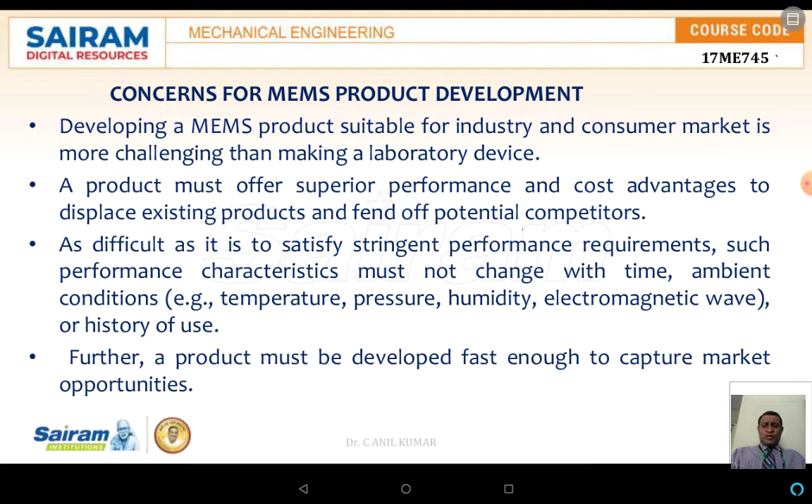What is the need for MEMS product development? Developing MEMS products is suitable for industries and consumers, but the major challenging areas are cost and size. There are many parameters affecting MEMS technology, making it difficult to satisfy the stringent performance required. Performance characteristics must not change with time or ambient conditions like humidity or electromagnetic waves. The product must be developed fast enough to capture market opportunities, and the development effort along with investor funding is also a major concern.

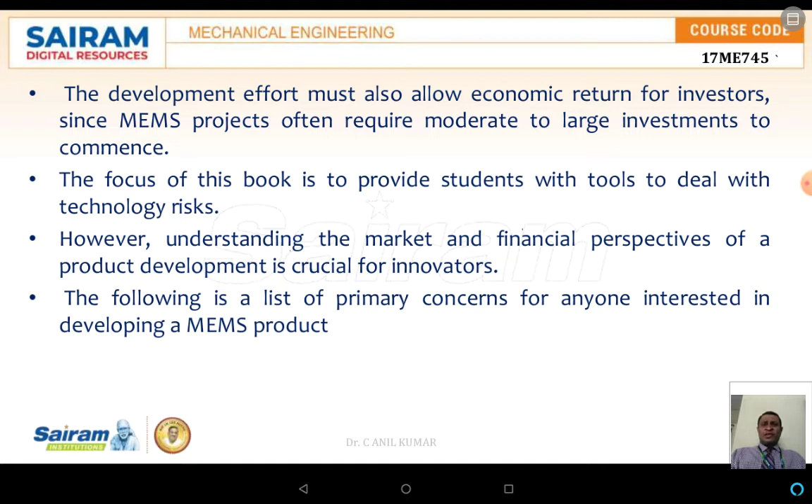This is the focus of our analysis: the concerns of MEMS product development. The first is performance and accuracy. MEMS devices rarely enter the market as a completely new product category. These devices must compete with existing products and also be low cost, as in the case of blood pressure sensors, accelerometers, gyros, inkjet printers, digital light processors, and resonators.

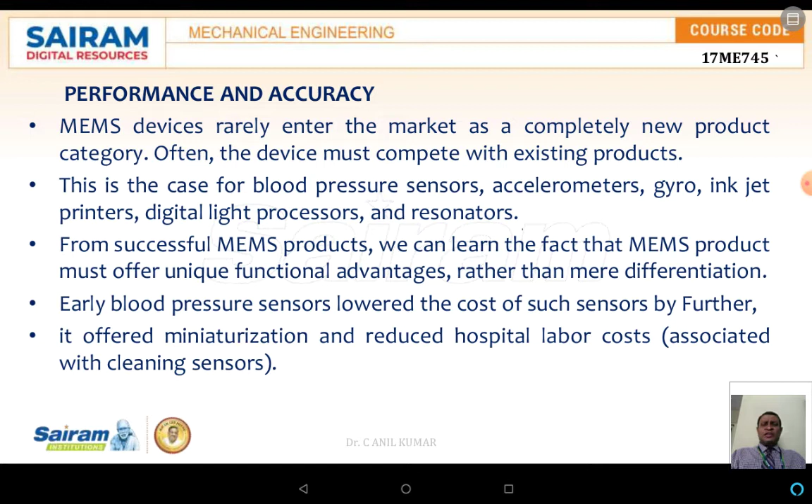From successful MEMS products, we learn that a MEMS product must offer unique functional advantages over other products. Furthermore, it offers miniaturization and reduced labor cost. As the technology is smaller, human intervention is less, but the fabrication cost involved is also very high. Since fabrication cost is high, it must go toward mass production, which will automatically reduce the cost.

Sensor devices must simply meet the requirements: detection limit, sensitivity, linearity, and immunity to noise, as well as environmental changes and immunity to crosstalk. The design of MEMS must allow such issues to be addressed.

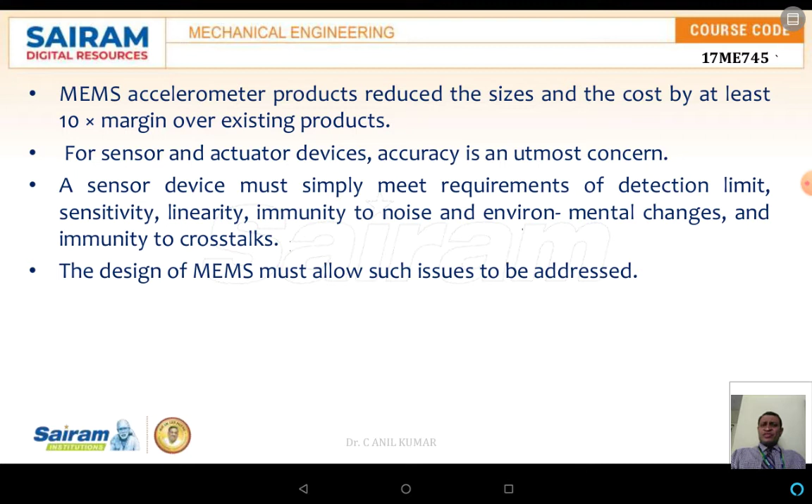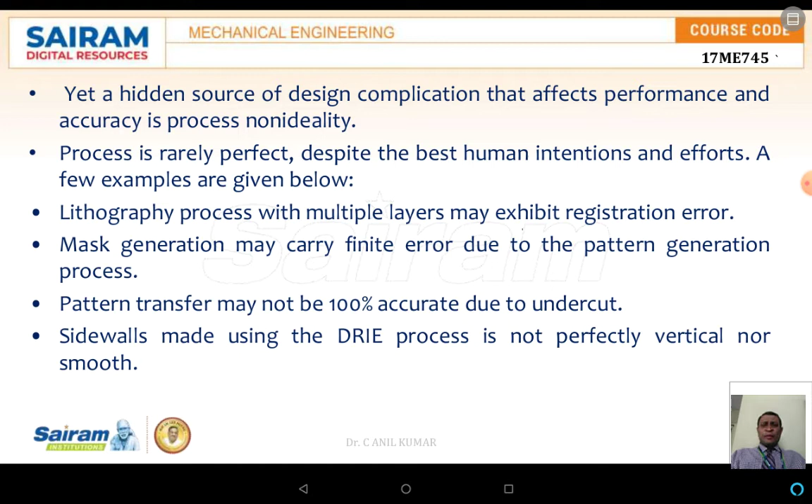There are hidden sources of design complications that affect performance and accuracy, process nonideality. The mask generation may carry a finite error due to the pattern generation process. The pattern transfer may also not be 100% accurate due to undercuts. The mask preparation and patterning are the basic design elements with respect to photolithography.

The next concern is repeatability and reliability. The MEMS product's performance must be known, calibrated, uniform, and unchanging over time. Performance characteristics change under certain circumstances, but they must change with a known trend, and the degree of change must be minimized.

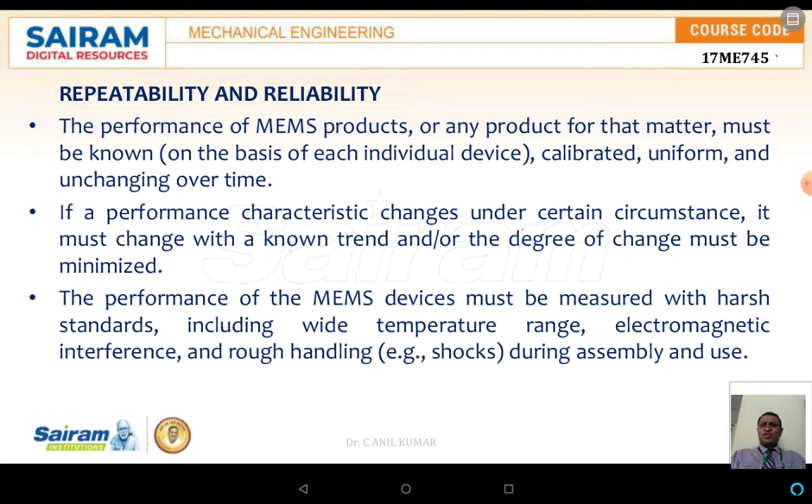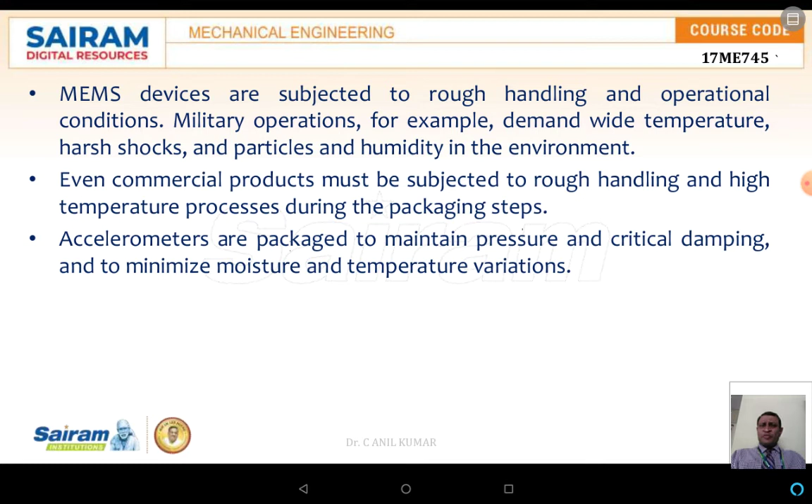The performance of MEMS devices must be measured against harsh standards or environments, which include temperature ranges, electromagnetic ranges and interference, and rough handling or shocks during assembly and use. MEMS devices are subjected to rough handling operations. Even commercial products must be subjected to rough handling and high temperature processing during packaging. All commercial MEMS products must strive for high stability.

Managing the cost of MEMS is one of the major concerns, since as cost increases, moving the product in the market becomes more difficult. If the product is for applications like military or industry, the cost is a little higher, and the most important parameter considered there is high accuracy. One can loosely argue that the advantages of microelectronic style and microfabrication are best utilized when the volume of the product is large. Indeed, many successful MEMS products are used in high volume consumer applications.

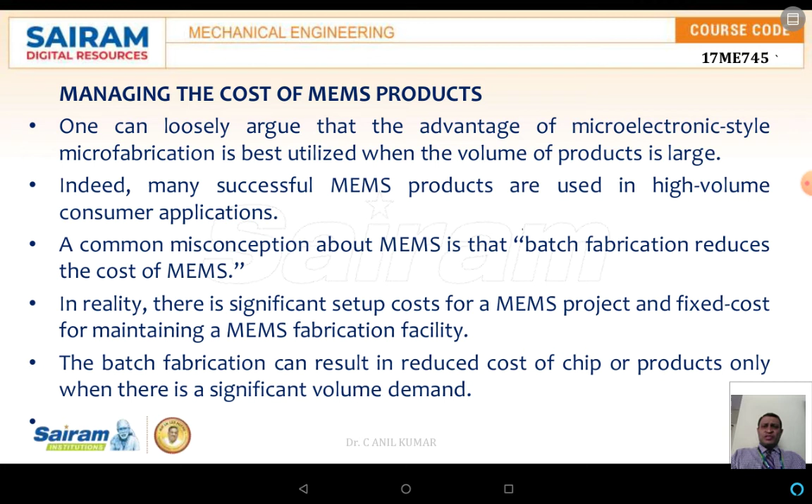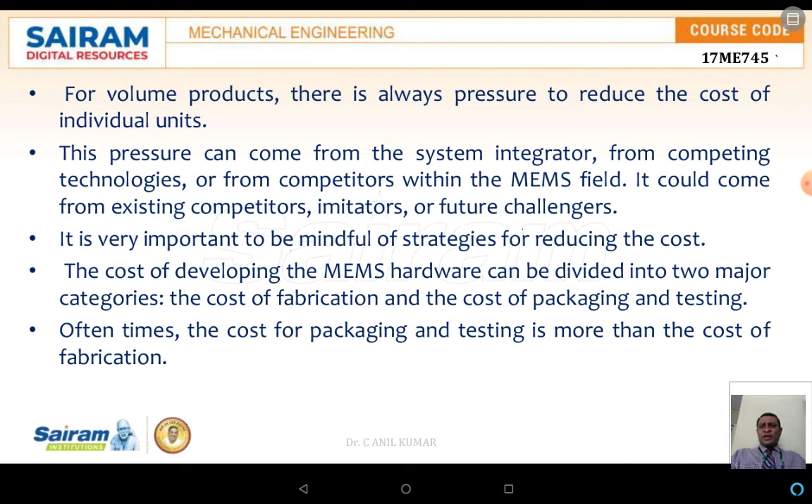The next concern is market uncertainty, investment, and competition. These three play a major role, and it entirely depends on the return on investment that most investors look into. For many developers, especially inventors, failure to justify the ROI (return on investment) means never getting sufficient resources to start and develop enterprise grade technology. Military and industry products may tolerate a higher price, but their volume is generally lower, especially in the case of batch production.

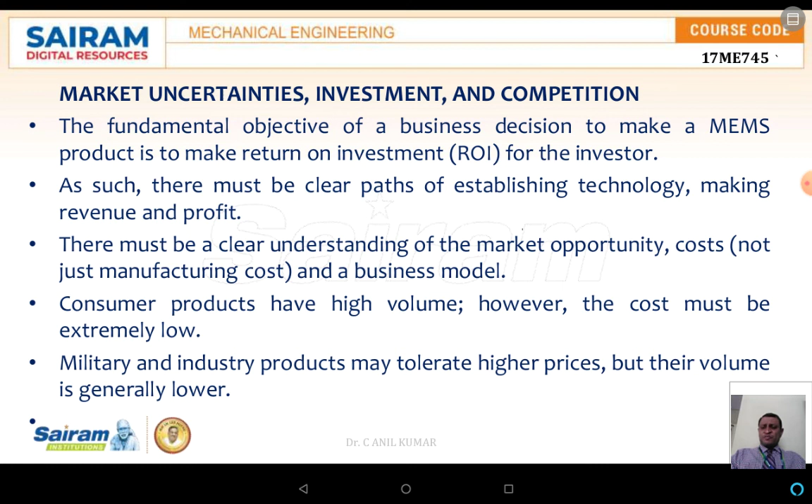The risk of the MEMS product broadly involves technology risk, market risk, and financial risk. As the technology advances, the sustainability with respect to market and financial aspects plays a major role.